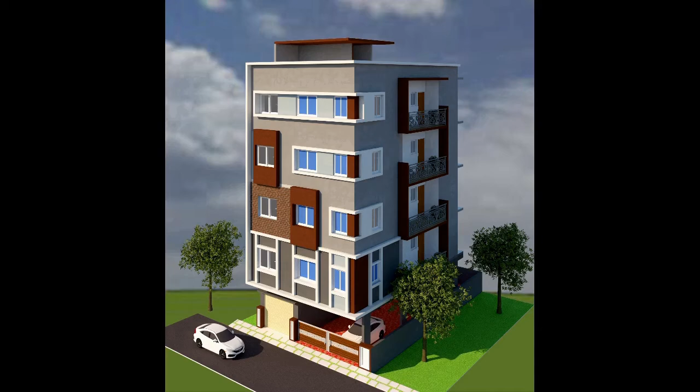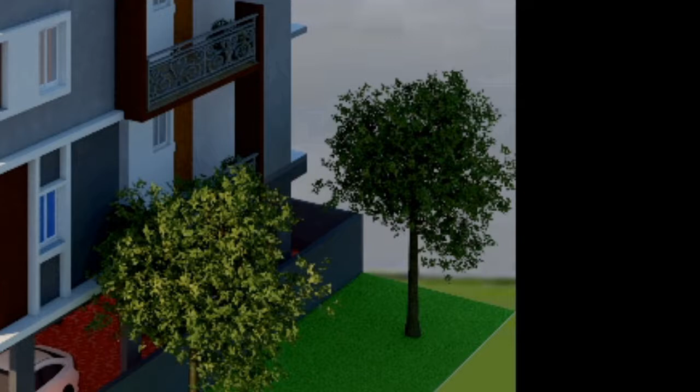Friends, in this video, let us discuss 2 BHK and 1 BHK units with parking for rental purpose in 1000 square feet.

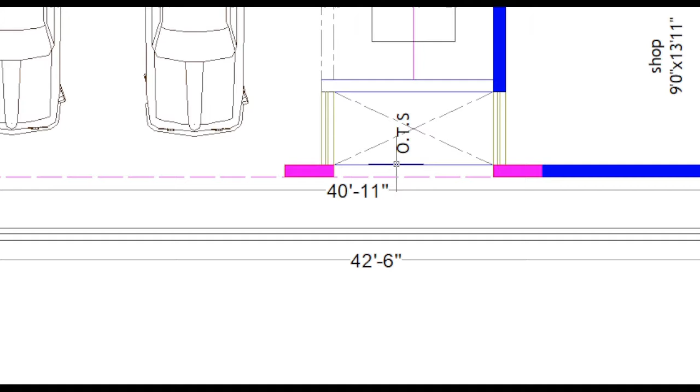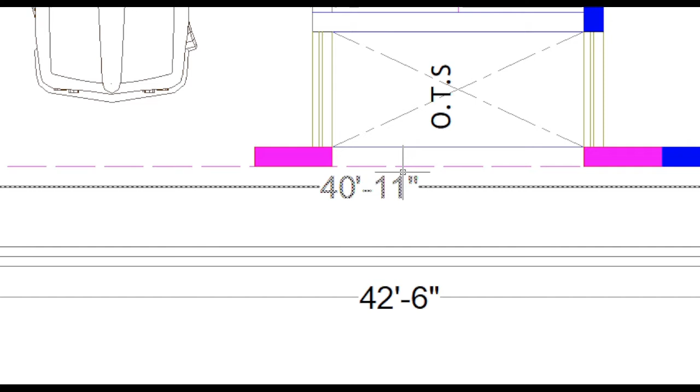We have a plot size 45 feet towards east, 42 feet 6 inches towards west, 27 feet towards north and 27 feet towards south. We have a built-up area of 25 feet by 40 feet 11 inches. Our plot is facing south.

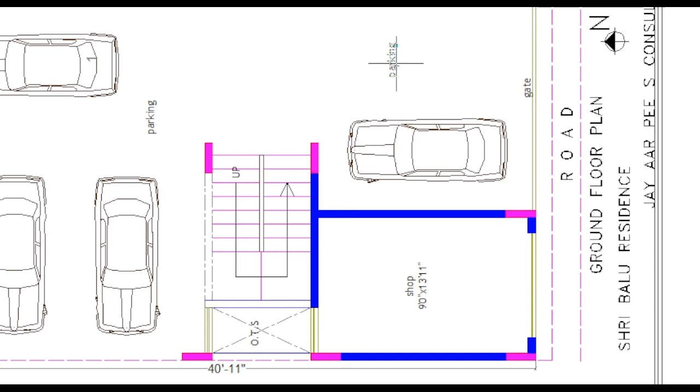In ground floor, we have planned for parking. Very spacious area. Main entry gate towards southeast. We have a shop in southwest. Once we climb the steps, from the stairs we reach a very spacious area to move around to our different units.

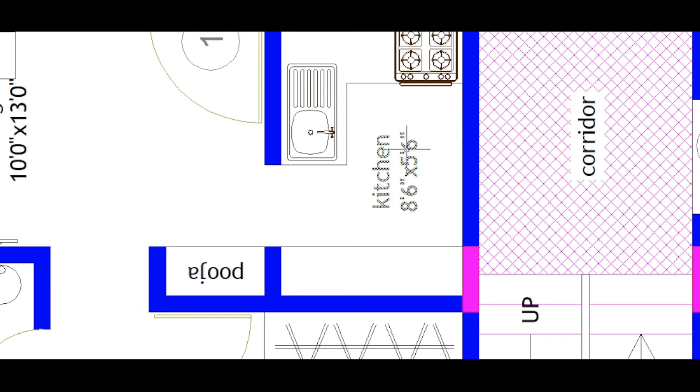Towards northeast, we have 2 BHK unit. Main door facing east. Opposite to this main door, we have a small pooja. Kitchen 8 feet 6 inches by 5 feet 6 inches. Towards northeast, we have living 10 feet by 13 feet. From living, we have a door to balcony towards northeast.

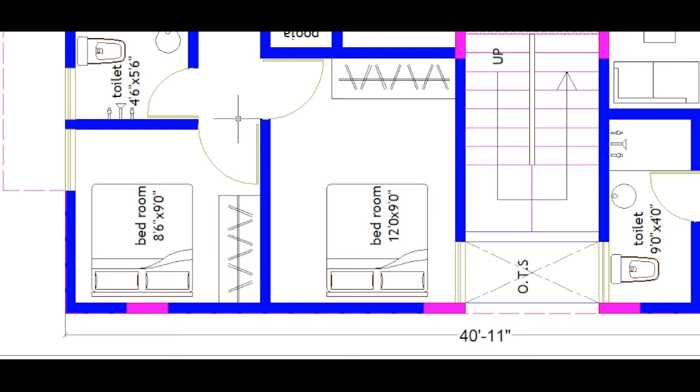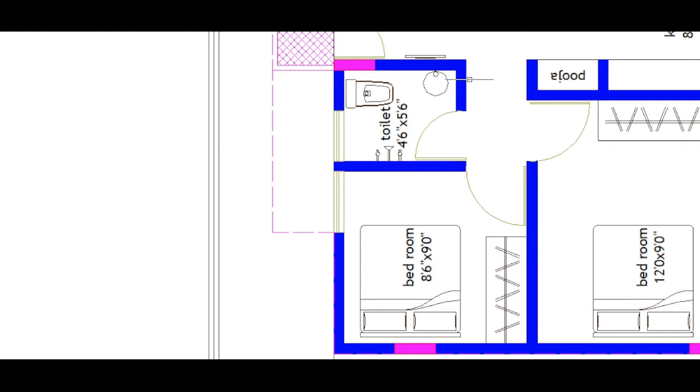We move towards northwest. We have bedroom number 1, 8 feet 6 inches by 9 feet. Towards southwest of this unit, we have bedroom number 2, measuring 12 feet by 9 feet. For this 2 bedroom, we have a common toilet in northwest, 4 feet 6 inches by 5 feet 6 inches.

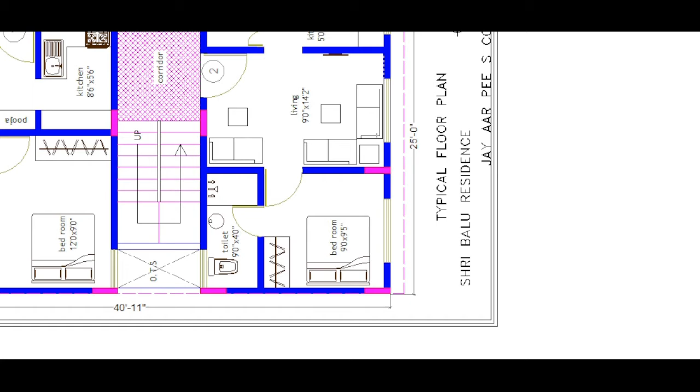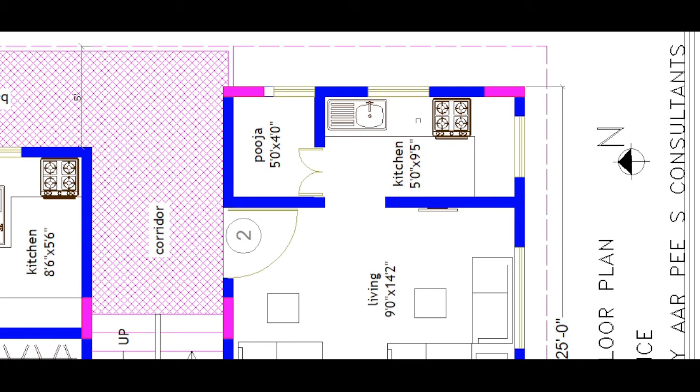Now again, from the stairs towards right, we have unit number 2, 1 BHK, main door facing north. From main door, we have a very spacious space, living 9 feet by 14 feet 2 inches. This area we can utilize as foyer to entertain guests. We have kitchen 5 feet by 9 feet 5 inches.

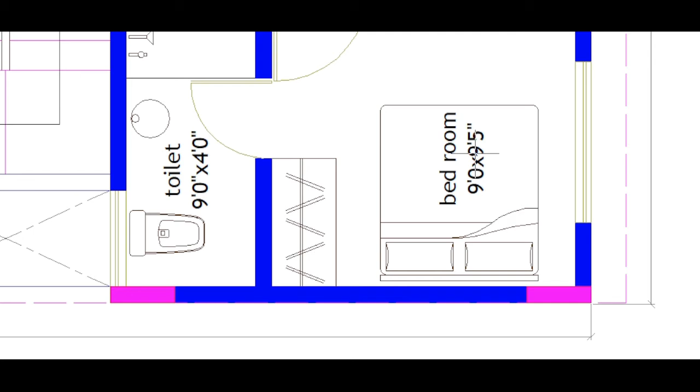From kitchen towards northeast, we have pooja 5 feet by 4 feet. Towards southwest, we have bedroom 9 feet by 9 feet 5 inches. And for this bedroom, we have attached toilet 9 feet by 4 feet.

Friends, this is a typical floor plan. We have structurally designed for ground plus 4 floors with 4 numbers 2 BHK unit and 4 numbers 1 BHK unit for rental purpose. Friends, I hope this plan will be useful for you.